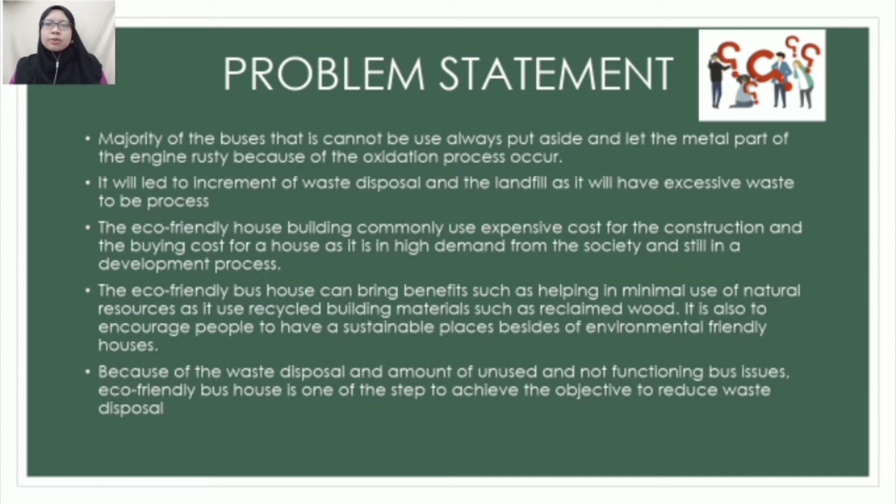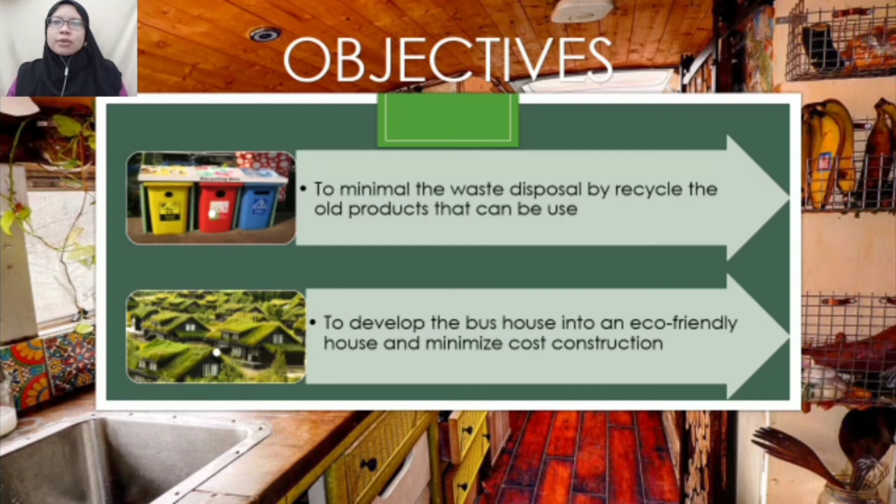Next is objective. The first point is to minimize the waste disposal by recycling old products that can be used, and the second objective is to develop the bus house into an eco-friendly house and minimize construction cost.

The description of bus house. Bus house, or the other name is skoolie. Bus house is a school bus that is redeveloped into the function of a house and uses the upcycling method. Upcycling method is a way to recycle a product that cannot be used in its original function and modify it into a function that's suitable with the product. It does not need any support drivers or towing support like recreational vehicles such as caravans.

And the last one is concept of the bus house. It is located in Muar, Johor. The description for this bus house is a one level floor bus. The total of the buses used is 4 and the area is 12 meter length and 3 meter width for each bus, and the total is 30 meter length and 10 meter width. It consists of bathroom, beds, kitchen and living room.

The estimation cost is 150,000 ringgit, including the cost of plumbing, cost of the buses and material needed for the conversion process. That's all from me.

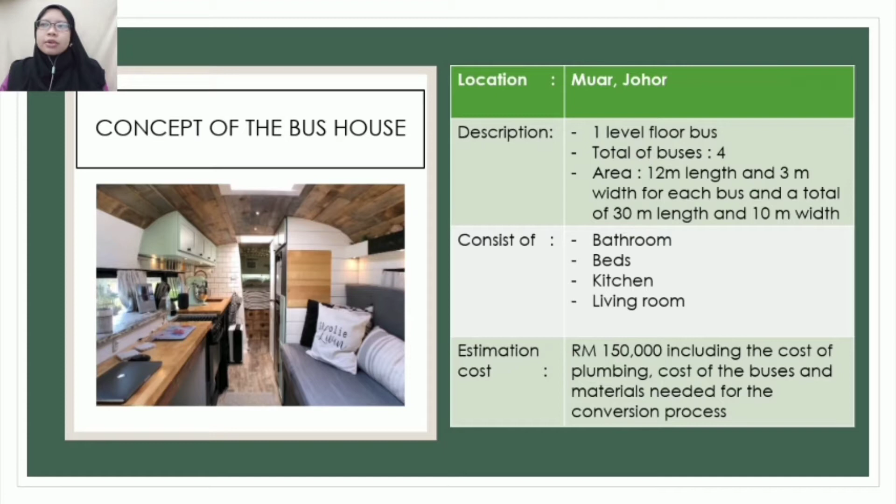This project develops the second-hand bus into a new design to be used as accommodation for visitors. This project is developing 4 second-hand buses, and the size of each bus is 12 meter times 3 meter times 3 meter for length, width and height. The area for the accommodation is 30 meter times 10 meter, which can accommodate 4 second-hand buses.

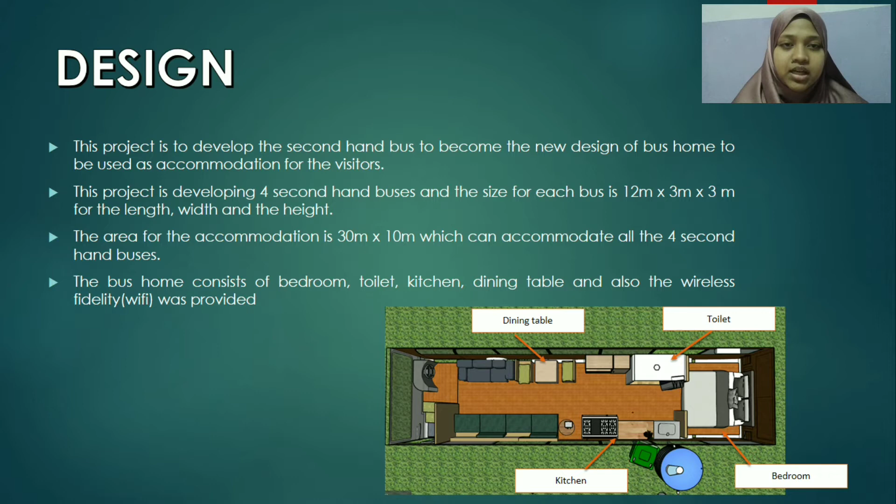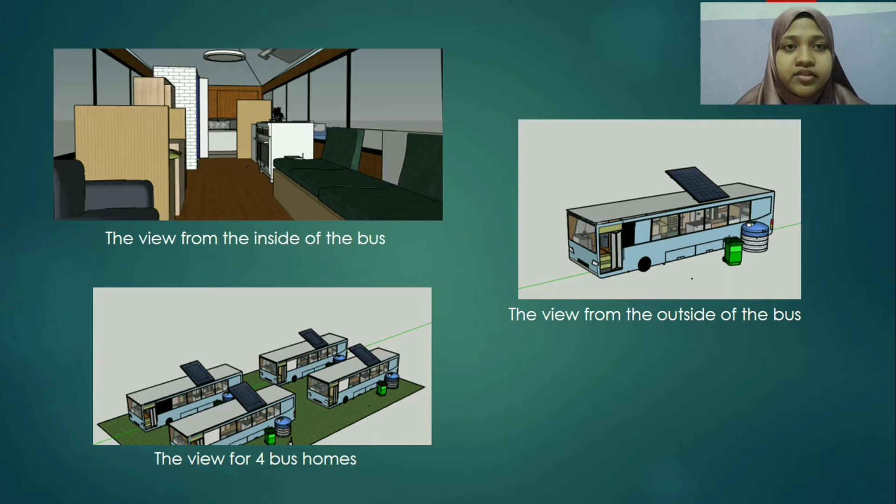The bus consists of bedroom, toilet, kitchen, dining table and also Wi-Fi is provided, as shown in the figure below. This is the view from the inside of the bus, from the outside of the bus, and the view of the 4 bus homes in one area.

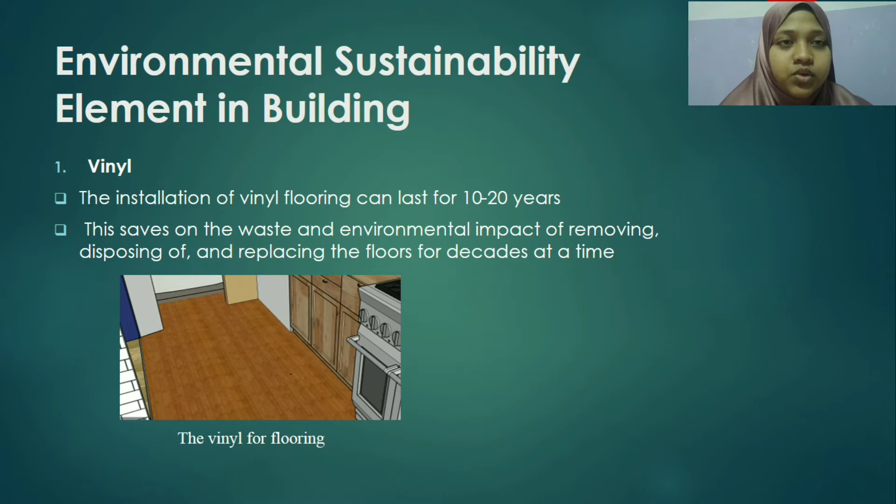Next is environmental sustainability elements in the bus home. First is vinyl. The installation of vinyl flooring can last for 10 to 20 years. It can save on waste and the environmental impact of removing, disposing of and replacing the floor for decades at a time. The figures show that we use vinyl for the flooring.

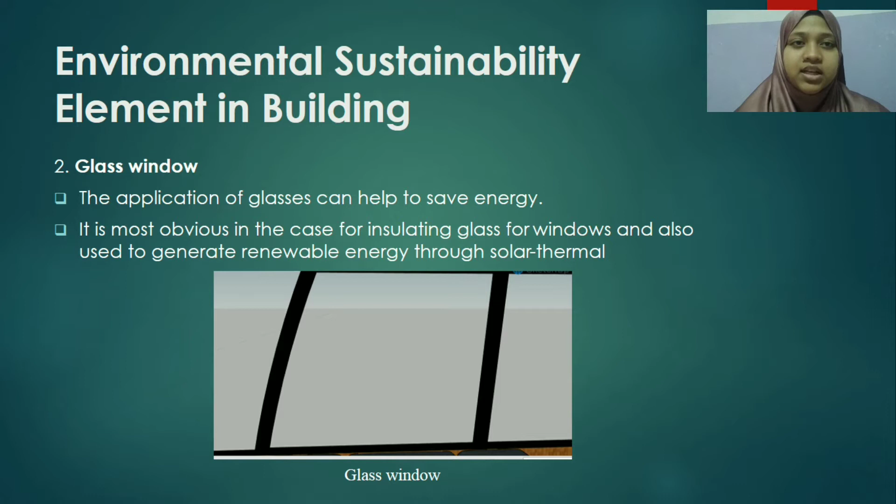Second is glass window. The application of the glass window can save energy. It is most obvious in the case of insulating glass for windows, and it is also used to generate renewable energy through solar thermal. Third is solar panel.

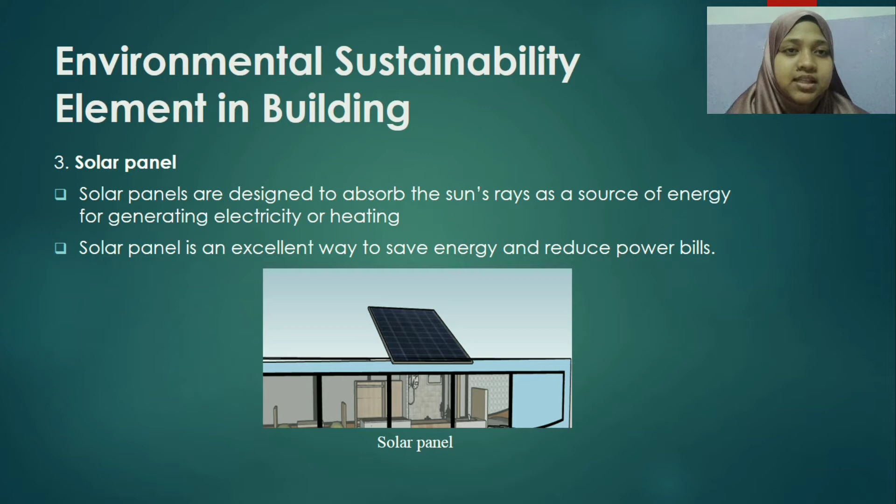Solar panels are designed to absorb the sun's rays as a source of energy for generating electricity and heating. That's why we put the solar panel at the top of the bus home, because the solar panel is an excellent way to save energy and reduce the power bill.

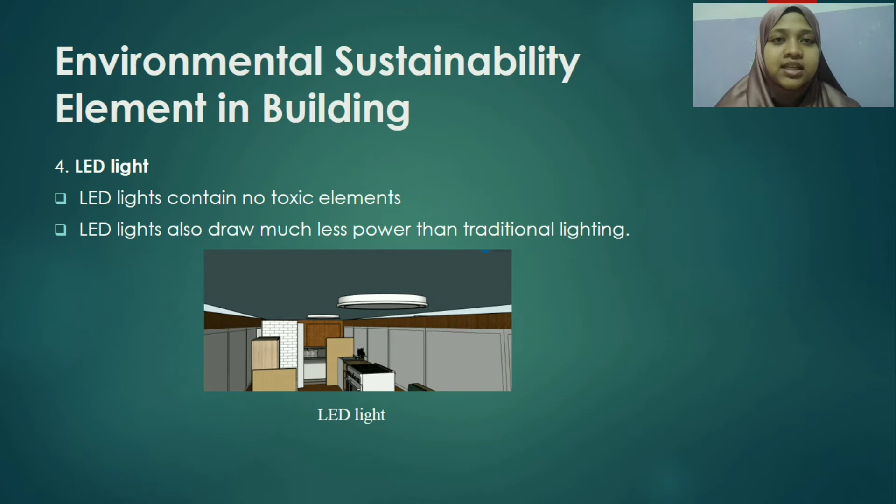Next is LED light. LED light contains non-toxic elements, unlike the strip light that contains noxious chemicals that can contaminate the environment when disposed in landfill. LED light also draws much less power than traditional lighting. Less energy use can reduce the demand from power plants and decrease greenhouse gas emissions.

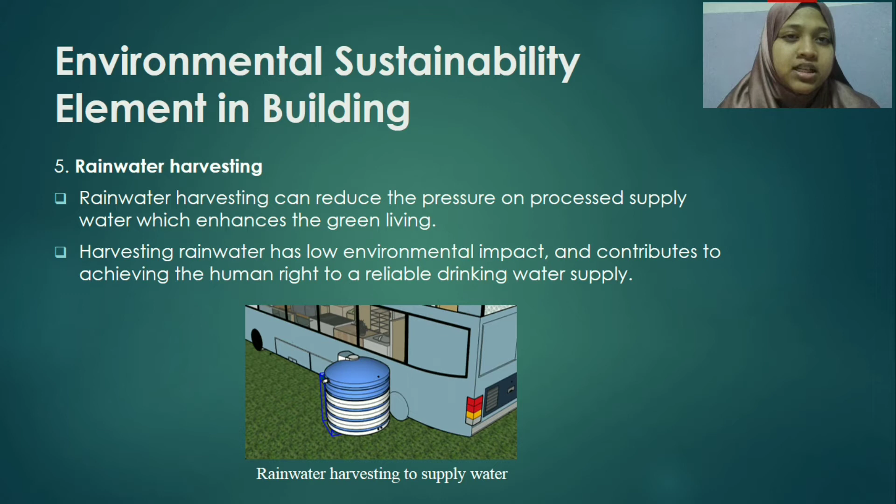Next, rainwater harvesting. Rainwater harvesting can reduce the pressure on processed water supply, which enhances green living. Rainwater harvesting has low environmental impact and can contribute to achieving the human right to reliable drinking water supply.

And last is wooden furniture. Wood is known to be one of the most natural renewable sources, which means it will have less of an impact on the environment compared to other materials. By using recycled wood, it can keep the carbon footprint very low, and generally wood is strong and durable.

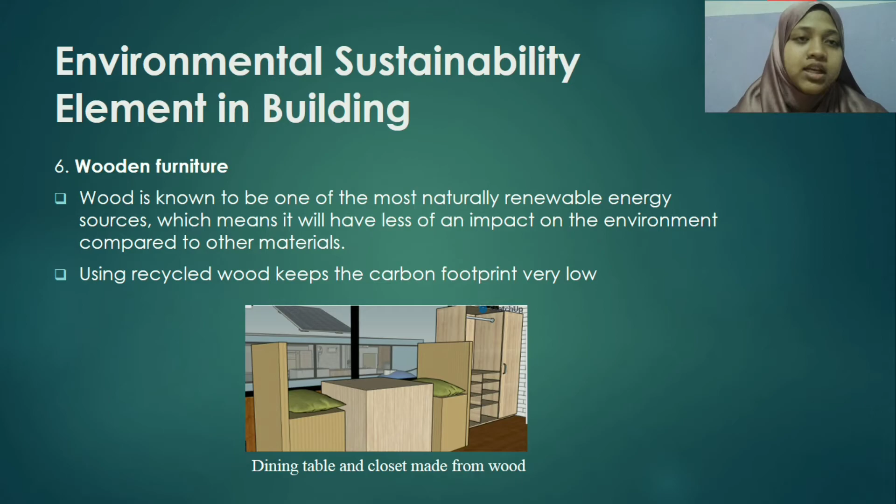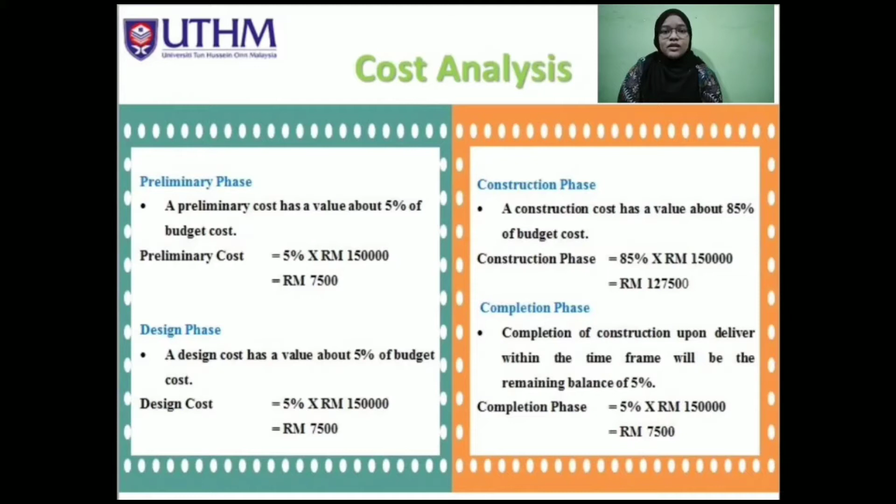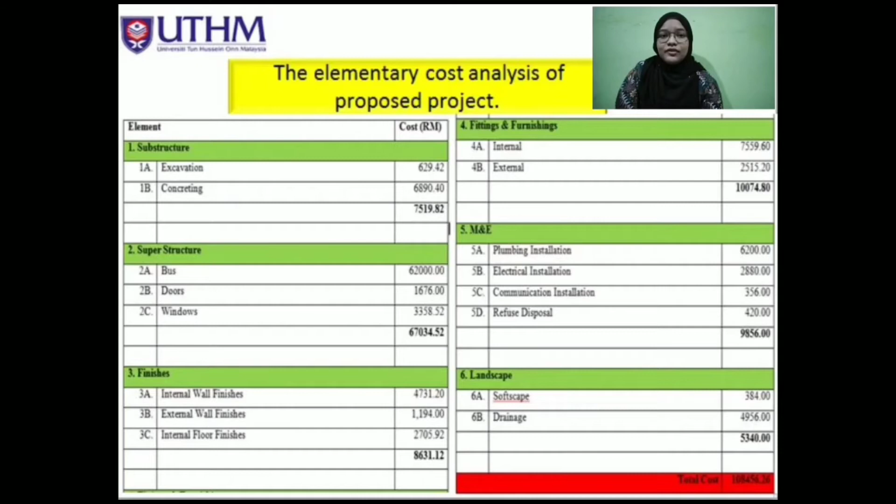Cost analysis. The cost analysis for the project budget has been broken down into 4 phases, including preliminary, design, construction, and completion phase. The preliminary and design phases have a value of about 5%, while the construction phase is about 85% of the budget. The balance of 5% will be in the completion phase. The total for the whole element is RM108,456 and 26 cents.

Cash flow refers to the movement of money into and out of a business. The cycle of cash inflows and cash outflows determines a business's solvency. Cash flow analysis is the study of the cycle of a business's cash inflow and outflow with the goal of maintaining an adequate cash flow and providing a basis for cash flow management. Cash flow analysis is divided into a construction period of 6 months and a 2-year fixed term tenancy.

Rent for the first 2 years is 100 per unit, and it will increase at a rate of 2% after 2 years, and the maintenance also increases at a 2% rate every 2 years. This includes other costs such as the maintenance fee of 1% of construction cost per year, tax and charges of 9,570, and insurance of 1,000 per year.

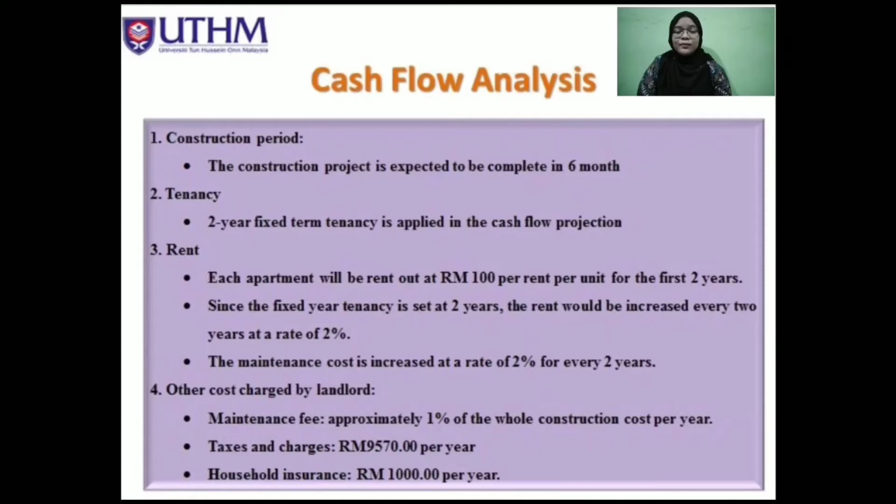The cash inflow for the consecutive 2 years is RM146,880, while the cash outflow is RM12,100. The cash inflow for years 5 and 6 is RM149,817 and 60 cents, and the outflow is RM12,130 and 60 cents. Gross profit at the end of the concession period of 6 years is RM275,373 and 70 cents.

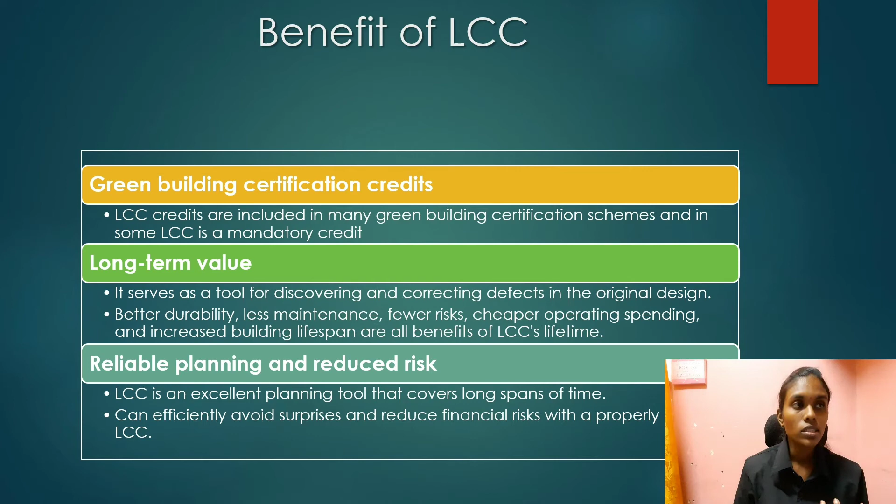LCC is a great planning tool, and it can avoid surprises such as sudden costs. There are 5 steps in the LCC procedure. First one is determine the time for the entire life cycle of our project. Second is estimate the value of each cost component, for example, superstructure, substructure, and many works.

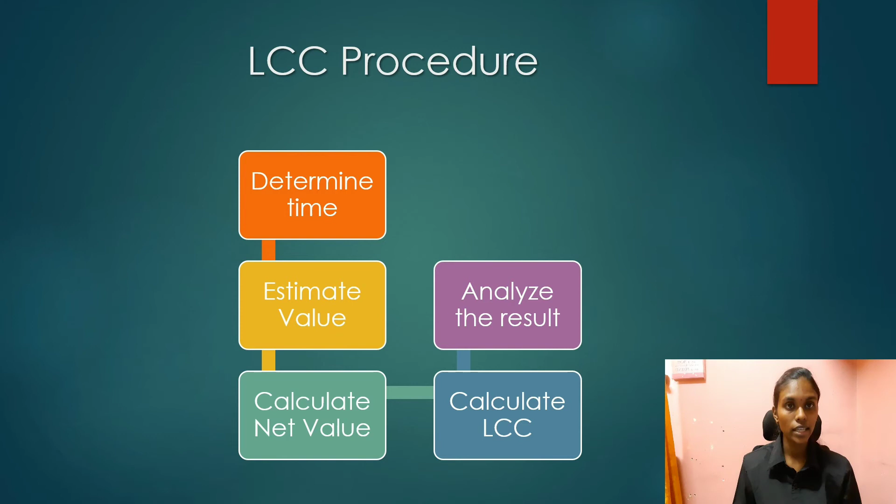Third is calculate the net value by estimating the future income. Fourth is calculate the LCC in terms of present value, and then finally analyze the reason and effect of life cycle costing.

Okay, now I enter project finance analysis for the project bus home. So from the 100%, 30% is from debt and 70% is from equity. So debt is 45,000 and equity is 105,000. For calculation of equity, we use data from Bursa Malaysia Berhad with a beta of 0.69, risk-free rate at 3.23%, and expected return from the market of 6.98.

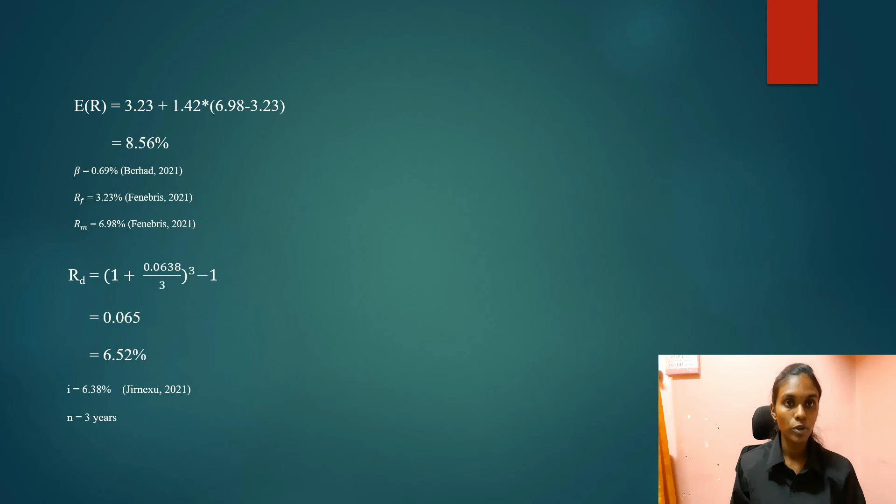Therefore, our expected return from the share is 8.56%. Next, calculation of debt. We take a loan from BSN for 3 years and the interest rate is 6.38% per annum. And our rate of debt is 6.52%. WACC of our project bus home is 7.48%.

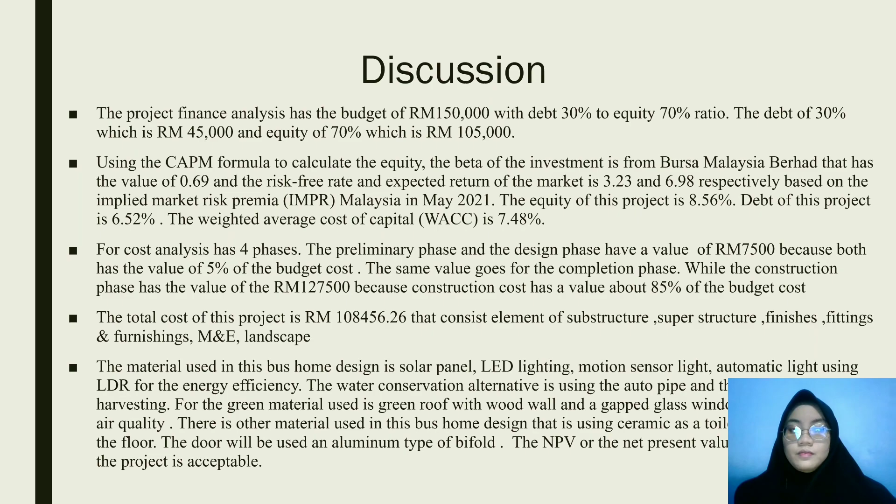As for the conclusion, implementing sustainable building construction practice has been an alternative in the building industry for economic advancement while minimizing the impact on the environment. The framework has the potential to significantly accelerate understanding and implementation of sustainability in building construction.

Its purpose is to provide a general framework for improving the quality and comparability of methods for assessing building environmental performance. It identifies and describes issues to consider when using the method for assessing the environmental performance of new or existing buildings. This sustainable requirement will apply throughout the various stages of the building life cycle, beginning with its design, continued useful life, and management of the building waste during the demolition stage.

This framework lays the groundwork for the creation of a decision support tool to aid in the decision-making process when implementing sustainability in construction projects. The benefit of implementing this framework effectively would deny the invalid accusation that green building projects are expensive and ineffective in the long term run.